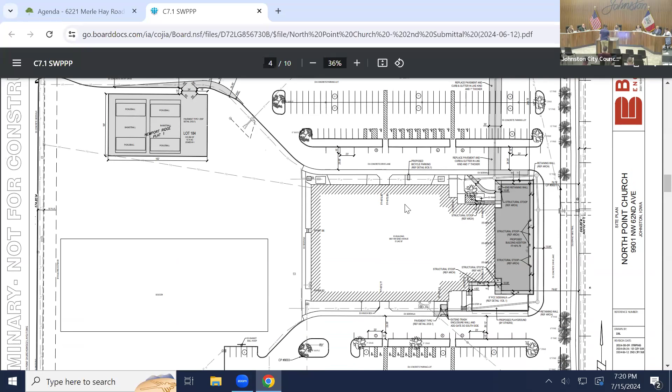This application was submitted by North Point Church as part of their childcare expansion. The site was rezoned this past April from R1 district to the C2 district, and as proposed meets all the required bulk regulations as well as open space and parking requirements. With the removal of the existing trees on the east side of the site due to the building expansion, the applicant is looking for council acceptance of an alternative landscape buffer consisting of 6 understory trees as well as 10 evergreens to be planted in line with the existing buffer that currently exists.

A new detention basin is to be constructed on the northwest side to pick up the new impervious surface that is to be built. The discussion last Monday at the Planning and Zoning Commission centered around the recreational facility next to that detention basin, the pickleball/basketball courts. That would be open to the public, and would be used for additional parking during big events such as Easter service or Christmas service.

A member of the North Point team is here. He can discuss in further detail their intended use for that and any additional questions you may have for them. The commission, the P&Z board, did recommend approval, and I can answer any additional questions you may have as well.

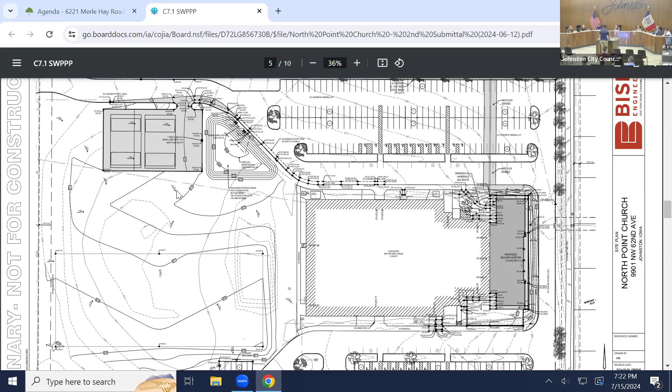Council, any questions for Jacob? I do, Mayor. Jacob, tell me again, how many trees are being removed? They're removing 12 trees on that east side, and they were going to replace it with 16 for that buffer, as well as 4 trees planted around those basketball courts in that detention basin. So we're removing 12, we're gaining 20. So they're planting 20, so we're gaining 8 trees in total.

But the trees that we're gaining, we're losing oak trees and gaining understory trees, which are typically not as long-lived as an oak tree, nor are they as supportive of native plant material.

Do you think the owner or developer would consider working some more oak trees back into the plan? I cannot answer that question for them, but I would give it a recommendation.

I won't make it a requirement, but we lose canopy all the time, and oak trees support a number of our native bird species more so, and they're longer living than the understory trees. So I would appreciate it if you could find some space for a few oak trees. Thank you.

Any other questions? Is there anyone in the audience that would like to address the council on this item?

Please state your name and address. Evan Riddell, 6708 Sheldon Court, here in Johnston, Green Meadows North. Greetings, Mayor, Council. Just to answer your question, I'm the Director of Operations at North Point Church.

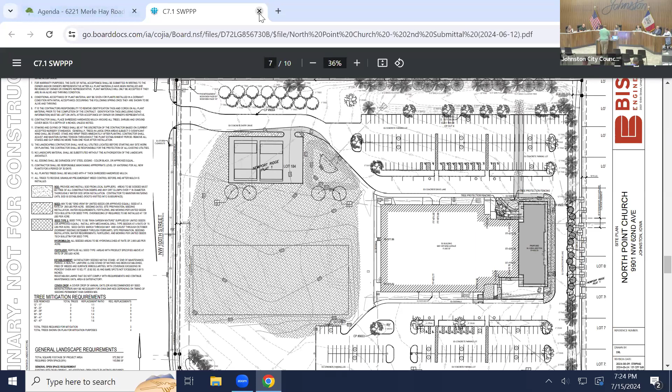Item 7C, consider approval of resolution number 24-189, a resolution approving the preliminary plat for Greenwood Haven Plat 1. The subject property is located at the eastern termini of Northwest Windsor Drive and Timberwood Drive, PZ case 24-16.

Good evening, Mayor and Council. Tonight you have in front of you a preliminary plat that subdivides 9.9 acres into 14 lots for single-family residences, 1 stormwater detention outlot, and 2 public street lots. Property is located at the eastern termini of Timberwood Drive and Northwest Windsor Drive, just west of the Greenwood Hills Park on Northwest 86th Street.

Start with a little background for you on this project. The parcel was platted as part of Greenwood Hills Plat 3 in 1996 as an outlot. It was intended for future development and extension of the roadways at that time. We just have not had the proposal come to fruition, and we have this in front of us now in 2024.

No other approvals have occurred to date. Property is shown on the Thrive 2040 comp plan as suburban mixed residential, and the proposed usage would be compliant with the comprehensive plan. Property is presently zoned R160 small lot residential zoning district, and lots would meet all bulk requirements.

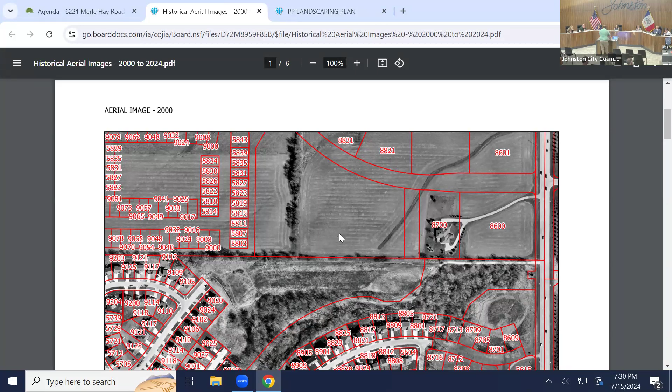The property is presently heavily treed. There's no debating that. Looking back at historical aerial images, a lot of these trees grew up since about 2000. I did provide you in your packet aerial images, which I also have up on the screen, that show the change of the area from more of a field into a tree-covered parcel by 2024.

The trees on the site - this applicant did do a survey pursuant to city code of 15% of the area. They did 2 samples, one on the north, one on the south, generally representative of the site, and then we can extrapolate out the total quantity of the site based on that data, as allowed by city code. They found a combination of ash, black cherry, boxelder, cedar, cottonwood, elm, hackberry, and mulberry within the site.

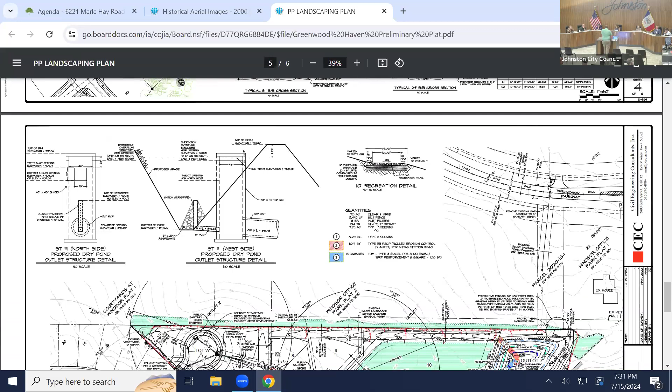The applicant is proposing to remove areas of the tree cover. They are looking to preserve approximately 3 acres of tree cover, with 2 areas of preservation of special note: a 25-foot tree conservation easement along the existing trail along the southeast, which would be a no-disturbance area. That is really intended for several purposes.

One, that is the area where we're likely to have the greatest benefit to the public, being that it's adjoining a public trail rather than internal to a private site. Our Parks Department also had concerns about constant flow from irrigation systems sheet flowing across the trail. In other areas of our community, we've had that issue where it causes a slimy surface. By having this 25-foot easement, irrigation systems couldn't be right up on the trail, so they'll have to sheet flow and infiltrate into the ground before they can get there.

So it should minimize that concern of getting a slimy surface on the trail, and that's what our Parks Department was primarily concerned about. Another area of preservation is within Lot 10. The applicant is looking to build their own personal residence there - they can certainly provide additional context of their plans on how they'll develop that lot. There is also a 15-foot trail buffer along the existing trail.

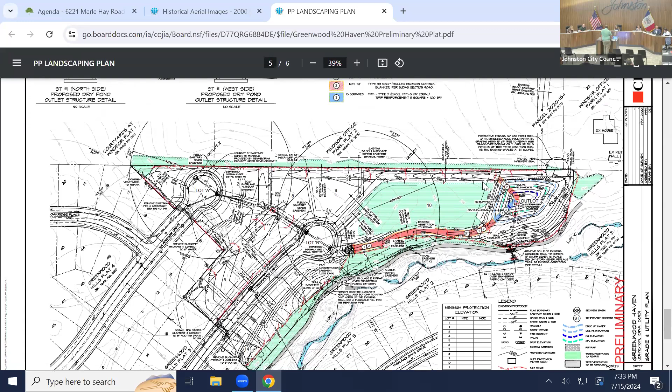The applicant is requesting council accept an alternative - acceptance of the mature trees along the trail in lieu of planting new trees. The exception would be if there is an area where they have to remove trees where that buffer is required, they would replace them in accordance with the standards. That would be in the lots 10 through 11 area. And then along the stormwater basin, those would be the areas where they'd have to come back and replant. Other than that, the existing mature canopy would be retained.

Parkland for the site was, yes. When you say along the stormwater basin, are you talking about the stormwater basin in Outlot Z? Yes. Okay, yeah - they are showing plantings there along the toe of the slope for the basin there on Outlot Z, on sheet 6 of 6.

Parkland for this site was dedicated with Greenwood Hills Plat 3 in 1996, so no additional parkland is required. The property is not located within any FEMA floodplain. All adjoining roads are presently constructed to urban standards, so there would be no improvements to adjacent roadways.

We did provide notice to immediate adjacent property owners as well as all property owners on Timberwood Drive down to the intersection. Those are really the property owners we anticipate to have the greatest potential for impact from this development, being immediately adjacent.

We did receive a number of public comments. I provided those in your staff report, and there was one additional that came in this afternoon. I provided that to you via email as well as added it to board docs. I also had a copy of the P and Z minutes on your board docs as well.

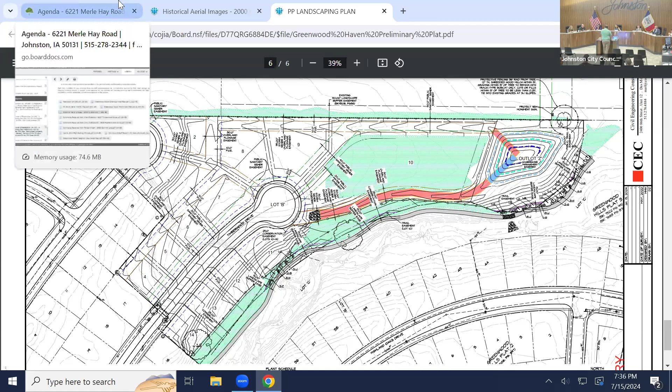Other questions for Clayton? I do have a couple of questions. The first has to do with, as you mentioned, the easements and private access across that north land. I know there were some comments and conversations in the P and Z meeting about the developer reaching out to see if they could secure, even beyond the sewer access, staging areas for equipment and things along those lines. Was there any further follow-up on that you're aware of?

I believe they've reached out, but I'll let the developer answer that since I wasn't involved in those conversations. I also want to make sure I'm reading this map right, since this isn't my forte. I'm looking at page 6 of 6 of the plat in front of you—the light green shaded area represents what? Trees to be preserved. Okay.

How many trees won't be preserved, as extrapolated from the survey? I don't have that number right in front of me, but I could certainly figure that out, maybe in between comments.

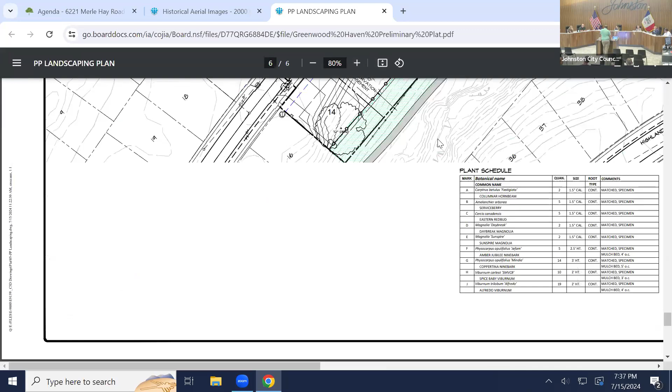The other thing I want to understand—the 25-foot conservation easement is measured from the back lot line forward. Is that correct, the rear lot line toward the front? Okay, so it's the rear 25 feet. It looks like, because the trail is currently encroaching, there won't be 25 feet of conservation easement away from even the center line of the trail in a couple of circumstances—is that correct? That is correct, and that would primarily apply on lot 11 here.

They are showing new plantings in accordance with our standard trail buffer easement requirements. What would be the distance from the edge of the trail to the conservation easement on lot 11—to the existing 25-foot easement? Yes, is there even a 25-foot conservation easement declared for lot 11? I believe it is shown, because there would be some preservation in the southwest area.

I don't know what that solid line is with those small circles—it looks like it cuts right to the trail. So they're showing some shrubs, some new trees here. They are showing the line that's in the trail—that's the center line. So I can get you a measurement. I don't have it off the cuff, but I can get one really quick.

While you have that zoomed in, do you see that lower left-hand corner of lot 11, nearest the trail? What does that solid line represent? This purple one? No, at least on mine it's black.

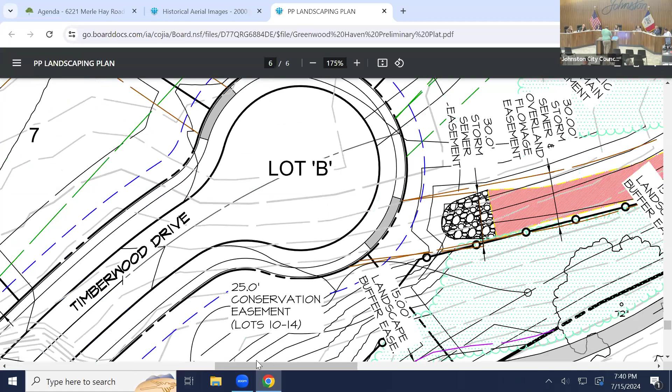And then lastly, let's talk a little bit about this overland flow. Will it cause trees to have to be removed to put in that overland flow? Yes. And what's an alternative to an overland flow? A pipe in the ground.

And the advantage of overland flow, as you shared with me last week, is it does allow for some evaporative means. It also allows for some kind of stilling of the water to some extent, right? So we get water quality improvements that we wouldn't necessarily have through a tube. That is absolutely correct. Okay, I just want to make sure I understood that correctly. Even if you did a pipe, standard would be you'd still remove the trees because you have to dig the hole to get it in, and we don't want trees over pipes generally, especially public utilities. So either scenario, I would anticipate tree removal. The swale at least gives us additional benefits for water quality improvement.

Is there any part of that swale that is within the 25-foot easement or the 25-foot conservation? Yes, this very southeastern portion. The version I have in front of me, which I updated earlier today, has trimmed that conservation easement back to the western line of the overland flowage easement. So that conservation easement would not run the full length of lot 10. It would stop kind of where I'm going over with my cursor there. Is that what's currently depicted right now? That's what's depicted on the most current version, which was updated a little earlier today, this afternoon.

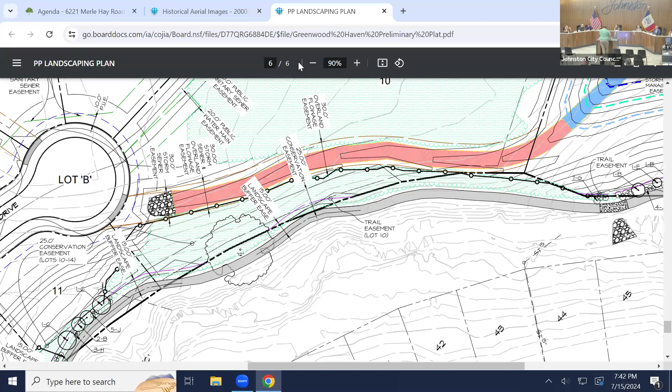We did a fairly extensive stormwater management project in this area between the two streets, between Highland Oaks Drive and Timberwood Drive. Was that the whole expansion all the way down to our park, or did it stop somewhere in there? Can you show on the map where that project stopped? It went all the way up to the public road. So it went from the park all the way to the public road?

Yeah, and the park was - so actually we've already constructed, gone through this whole ravine fixing the eroded slopes? Yes. For some reason I thought it didn't cover that area.

Okay, and through that whole area the pond was constructed to address some water quality and quantity requirements. We made it pretty much as big as we could with the footprint we had. It's not the size that would meet current standards, but considering the original developments didn't have any stormwater management, anything was an improvement, really. That was going to be one of my questions, because I watched the P&Z video, and someone had mentioned that it was undersized, but we pretty much got it as big as we could with the space we had. Yes. Thank you.

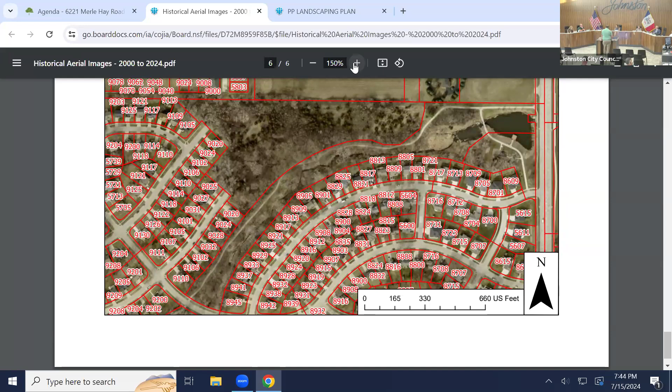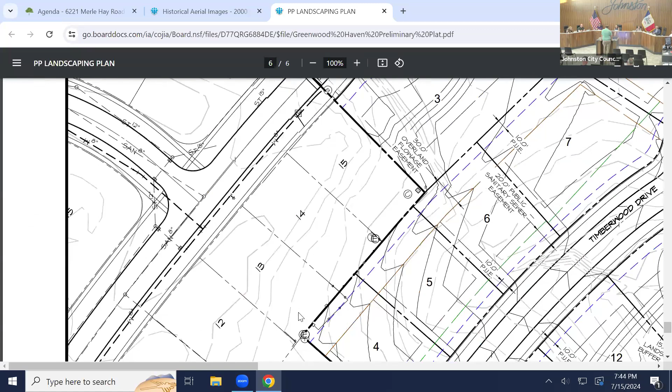Other questions for Clayton? Just as a little bit of follow-up, I also listened to the P&Z meeting, and one of the things I heard from some of the residents who talked at the meeting was concern they've expressed, or met with city staff about, erosion they've seen along - not along the trail, but stream bank erosion after that project was completed. I wasn't aware of that. I don't know if you or Dave, or maybe I just misheard, but what I was hearing was that there were some residents who felt that the erosion protection project maybe didn't come to fruition as desired. I don't know if you or Dave could add anything to that.

So that comment was specific to where this new outlet comes, where it intersects with lot 45 to the south here, right when we're starting to enter into the forebay. I think it's important to remember streams do meander and move over time, so some amount of movement and erosion is to be expected. This would not be anticipated to make it worse. They are showing erosion control stone that would come from the outlet, and with the construction plans we'd get a lot more precise detail to make sure it's coming up to the top of bank on the opposing side, so any outflow is not causing an erosive situation on the opposing bank. That would be intended to be more fully detailed in construction plans, but for preliminary plat purposes, they are showing erosion control protection at the site where the erosion concern is.

We are aware of that area as staff, and we are continuing to monitor it. But like I said, it is kind of entering the forebay. That slight movement one way or the other is to be expected, and it hasn't reached the level of concern to warrant city intervention yet. Okay.

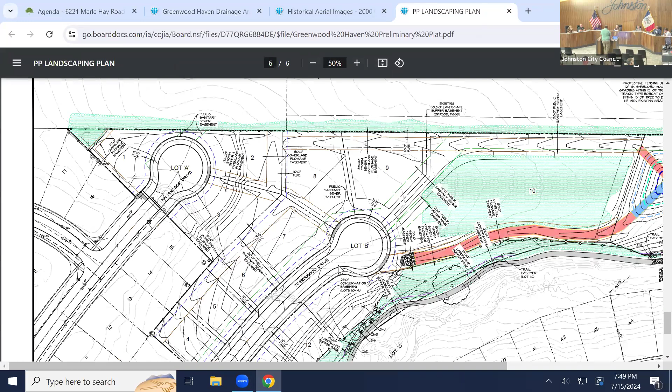There's been a question raised about the cul-de-sac on Windsor Drive — I think it's Windsor, whatever the northern street is there — that if cars are heading into that area, whether there's enough of a buffer for the people who live in the neighborhood to the north in that EPCON area to keep headlights and those types of things out.

As I understand, with a development like that, each developer is supposed to have a 30-foot buffer — could be 15 feet on one side, 15 feet on the other. But in this case, EPCON has all 30 of that on their property, right? That's correct.

And I drove up there today, just as a follow-up to prepare for today's meeting, and it looks to me that EPCON has built a small raised area — a berm, thank you — and there's even some plantings on top of that, and obviously a lot of existing vegetation there too.

Is that your understanding as well? I went out there today as well, and from my inspection, it does not appear any of the required landscape plantings have been installed to date. I did make the developer aware this afternoon that they are required to get those installed.

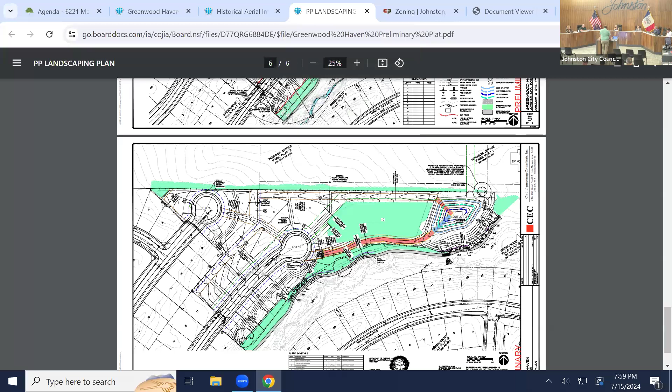Mayor, I have a follow-up since we're on the topic of protected trees. Does staff feel comfortable that we will not be losing any of those protected status trees based on an extrapolation of 15% of sample? Well, a protected status tree is anything 6-inch caliper diameter or larger. And I never saw anything in the site survey within that 15% that talked about a caliper size of 6 inches or larger. Is the sample quantity only those that are 6 inches and larger?

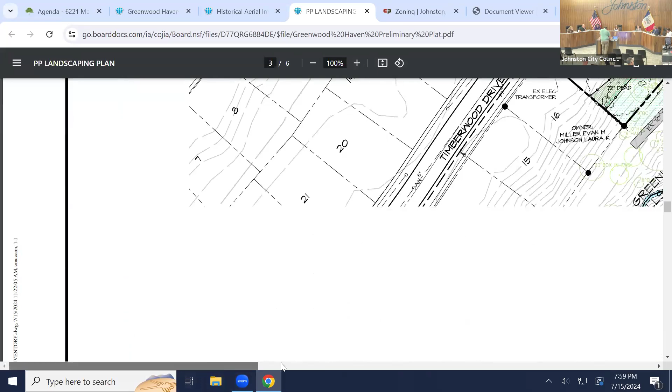I'm looking at the staff report where you listed the table. In the staff report I did not get the specifics on it, but on the plan itself, sheet 3 of 6, bottom right-hand corner, they do break it down by species and size. For the purpose of the staff report, I just consolidated it down to species to really try and reflect diversity of species, but that data is presently up on the screen.

Does our current resolution before us explicitly indicate our revocation of these protected trees that are listed on page 3 of 6? It does not explicitly state that. By approval of the plat showing the removal, you're approving the removal. It's not explicitly written as such.

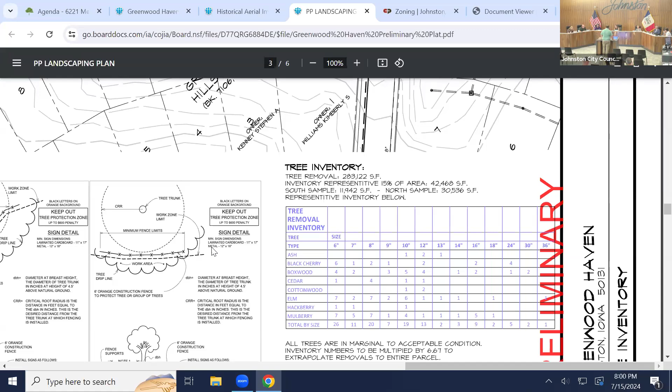And just for clarification from our legal counsel, based on the ordinance that Clayton pointed out, do we need to explicitly revoke? Can you go back to that ordinance, please, Clayton? The code specifically says that protected tree status may be revoked by the city council with the approval of a site plan or plat. So if you are approving a plat that shows tree removal, you are approving that tree removal. That is implied through that. And that is consistent with how we've done past approvals as well.

Any other questions for Clayton? I do have one last question for Clayton, I'm sorry.

So I'm looking now at sheet, I think it's sheet 1 of this site plan. Cover sheet? No, I'm sorry, sheet 2. This kind of goes to council member Burkhart's question about protecting trees that are on lot 10 as that overland flow easement gets close. So these are all the circles of trees that would be—if I see a circle and I see a tree numbered, is that vegetation that's going to remain, or what is the dividing line?

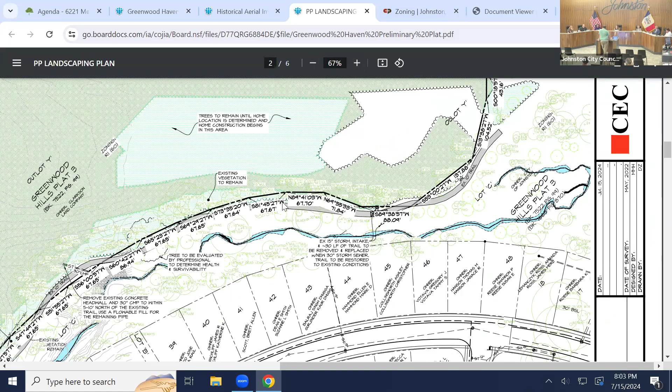Lot 10 still has trees in the buildable area. So the dark green that I'm looking at on page 2 of 6 has that massive span of hatched green. That's what you're calling the dark green. And if maybe I misunderstood, any tree within the hatched area, we're giving permission to be taken out.

Yes, that is what the applicant has requested. Clayton, how many trees is that? I'll get you that number when I sit down, I do not have that right on the top of my mind. The applicant can certainly provide additional commentary on their basis for the ask.

So if I- the light green hatch is not tree removal, those are protected trees. No, I'm looking at the dark green area all around the island of light green.

All where lots 1, 2, 3, 9, 8, 7, 6, 5 - all of the trees on any of those lots could be removed? As proposed, they are requesting approval to remove all those trees.

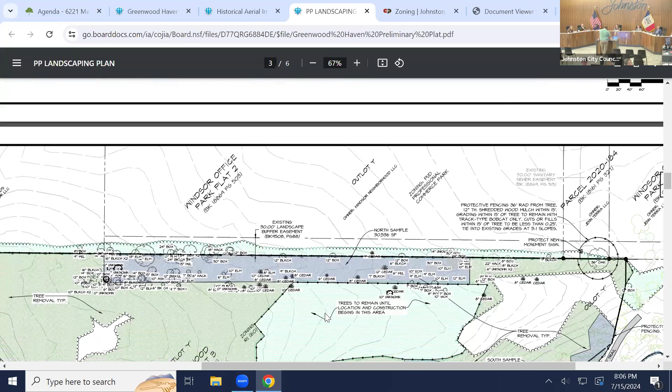But the condition that we are being asked to approve, number 5: city council acceptance of an alternative buffer for the required buffer along the side and rear lot lines adjacent to Greenwood Hills Greenway Trail. Said alternative buffer shall be composed of existing mature trees to be located within a tree conservation easement encumbering the southeastern 25 feet of each lot. When gaps in the existing vegetation are created due to removals, new plantings shall be installed in accordance with the standard buffer requirement.

I don't see any language in 5 that indicates that the buffer would be any less than 25 feet. I think the intent, and maybe it didn't come through well, is the fact that there's not technically a buffer that encumbers into this site at that location. If you measure 15 feet from the center line of the trail at that location, it stays on the city-owned parcel.

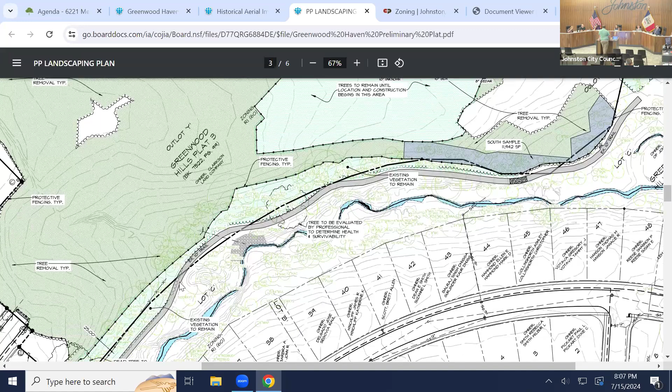As you move west, it does get onto their site. What gets onto their site? The 15-foot buffer - it's measured 15 feet from center line of the trail. Right, but we're waiving the 15 feet.

I just wrote it as a blanket statement with the intent being, and maybe it should have said it this way, where the buffer is required, we're accepting the 25-foot easement in lieu of planting new plants. But why isn't the buffer required all along Lot 10? Because even if you said it just like you just said it - and I think it could be interpreted that way, and I guess if that's the way the council feels, that you're granting the alternative with the construction plans, we just make sure that additional plantings are shown in that location where they'd be doing removal.

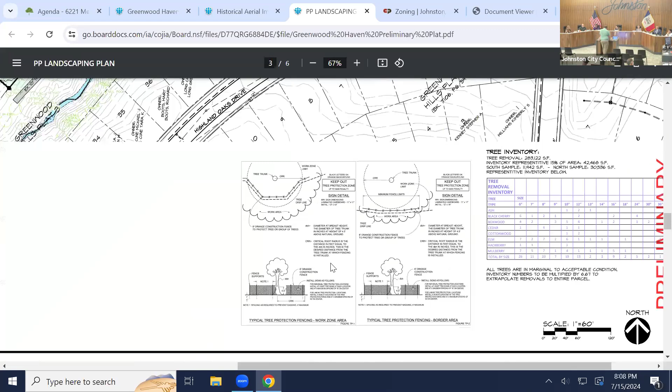I don't think the condition says that. The condition talks about a 25-foot easement shall be composed of existing and mature trees to be located within a tree conservation easement encumbering the southeastern 25 feet of each lot. So their tree conservation easement doesn't encumber the southeastern 25 feet of each lot in that spot, correct?

No, so just to make sure I'm understanding correctly, as they have it shown, you're thinking condition 5, if it was to match what they're showing, should be the southeastern 25 feet, except the eastern, I don't know how far that is, 120 feet or so. I'm not saying that's what it should say, but I just want to make sure I'm understanding what you're saying.

What I'm saying is that the language in condition 5, as I understand it, we're replacing what would otherwise be a 15-foot easement with a 25-foot easement, right? Yes. Okay, and it states that that 25-foot easement exists all along the property.

But I think we're acknowledging, or you're acknowledging, that that isn't the case in the final 120 feet of the area, and that's part of the area where the trees are planning to be removed per the green hatching, with all the trees being removed. So I think part of it is that the condition in number 5 isn't accurately stated, and I think is confusing.

And I think that leads to the additional trees, which gives the developer the authority to remove trees that some folks may have concerns about. I'm certainly willing to, I think part of this is because it's an overland flow easement, right? And I see value in the overland flow easement, so I'm certainly supportive of that. What I'm not supportive of is conditions that I don't think are accurate to what the plan really says, and I don't think condition 5 is accurately written.

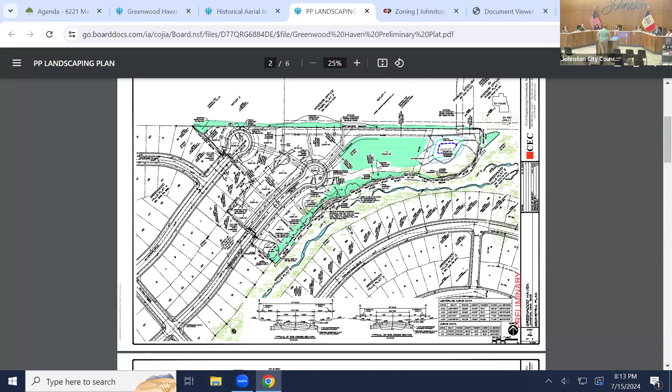Let's go back to that hatched map, page 3 of 6. I just want to make sure I understand. I presumed that the blue hatch was their sample areas. Is that correct? Correct. Is it safe to assume, which I know gets me in trouble, that the blue hatch, though for the purposes of tree removal, is the same as the dark green hatch? In other words, anything in the blue hatch could be removed?

Is there a disclaimer? Don't think that they are one and the same. For the removal purposes, I would direct you to page 2 of 6.

So anything in page 2 of 6, which appears, at least on the northern side, to be the same. Yeah, it's the southeastern one. I can't tell right from... without zooming way in probably.

Melissa, maybe you know, does the southeastern area encompass removal, or is there an area of preservation? That is an area of removal for the construction. So both areas of blue would be within the areas of removal.

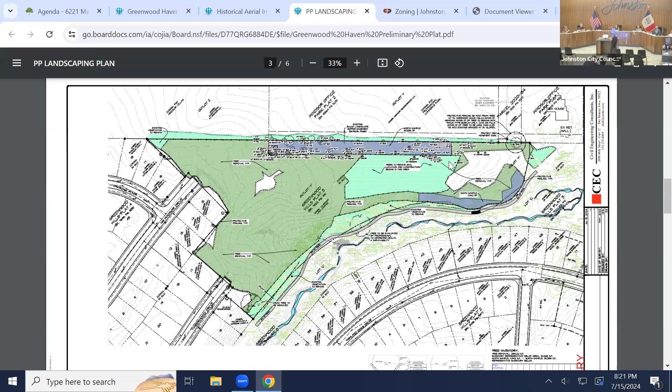I see why you like that property. That's why we bought it. But I also hope you see that's why we want every tree to stay wherever we can, at least along that property. Councilmember Cope pointed out that there is not, in your plans, a conservation easement along that last 120 feet or so of the property on the southeast side. Would you entertain putting in a conservation easement? And if that impacted the location of your overland flow, would you consider moving it so we could keep that conservation easement?

I was talking to Melissa. I think she said that's the only spot she could put the overland flow without disturbing things. You can come and speak. I'll defer to her. I do want to speak to something.

I do want to note how much we appreciate the changes and modifications you've made in the proposed development: fewer lots, a shorter cul-de-sac. I also really appreciate that you agreed to submit the plan under our existing stormwater regulations as they existed prior to July 1st. Thank you.

Those concessions and your willingness to do that is not lost on me. I think those are very substantial and are greatly appreciated by me and I think the residents of our city. I just wanted to take this opportunity to thank you. Thank you so much personally for saying that. We want to do the right thing.

Melissa Hills, Civil Engineering Consultants, 2400 86th Street. Regarding the trees along that 120 feet on lot 10, the swale has to go in that area in order to get the grades to work, to get things to flow to the pond. If I tried to move it north, I would be cutting a ridge through the hillside, which would create more tree removal. So this has the least impact where it's located. We are preserving trees both north and south of where the swale will be. There's still 18 to 20 feet of buffer between the trail and the swale grading.

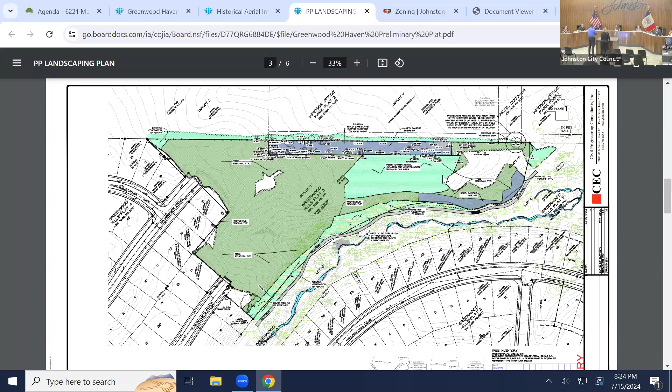Maybe you could clarify, does the diagram that shows the overland flow easement also indicate the trees that are impacted, or are those on two different slides? Because the blue hatch doesn't really show the overland flow easement, right? Let me see if I can get it to show that.

So there are some trees from the previous tree study that was done with the city project. They all appear to be smaller trees, 10 to 15-inch trees, cottonwood, elm, mulberry. So I don't think any of these are necessarily desirable trees that are in there.

I think the challenge, and I share Councilman Burkhart's interest in this, is that you're walking along that trail. From a trail perspective in Johnston, that's really one of two trails that are heavily wooded. So when you're walking by, the trees that exist there are providing you an ability to escape the urban environment. I don't care if it's a cottonwood tree or whatever tree it is. Obviously, if it's a tree that's dying and poses a safety hazard, that's a concern.

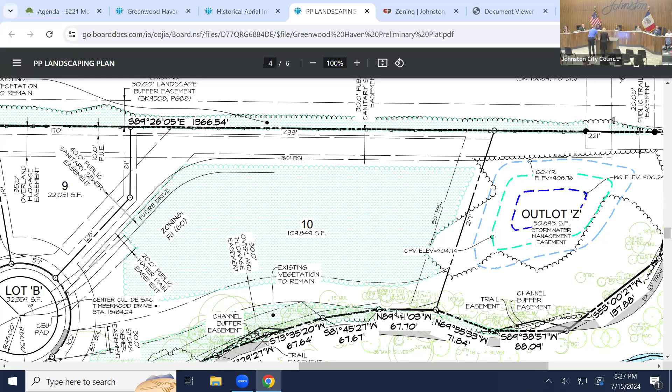So even at the closest point that it gets to the trail? Like, it looks to me as you go further east, right where it says S89, there's a dot that looks pretty close to the trail. And then further west, the grading line - where is your grading? Where do I see the edge of your grade? You'd have to go to the grading plan.

Basically, the grading goes up to the property line here, but there's still some space down in here that is not disturbed, where you see the red X line. The red X line is your grading limit? That's the silt fence that's shown there.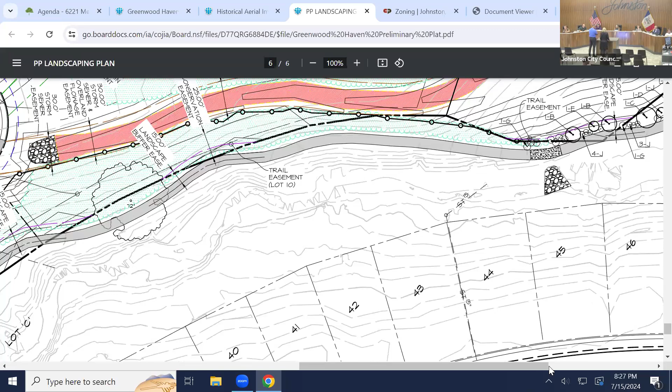Just, I guess, the thing is as you go further east, it gets closer and closer to the trail. Correct. And so where we are close to the trail, we've proposed the landscape buffer because that grading is necessary to get our pond volume and to get our pond constructed. So we are providing for new trees to be planted along that route adjacent to the outlot. But adjacent to lot 10, you've got this area inside city park ground that's not going to be disturbed, and we're in excess of 25 feet here.

But then on outlot Z is where you're proposing to plant a series of trees, kind of with the intent that those plantings don't get you back to a 25-foot easement though, right? Does your conservation easement extend to outlot Z? No, it does not. So it ends at lot 10?

Okay. Well, we trimmed it back because I guess we received comment that you didn't want it to overlap the overland flowage. So we trimmed it back to only include the areas that were not encumbered by that overland flowage.

Yeah, we'll definitely be open to planting trees around the pond. I mean, we like to bike and hike and run on the trails, so we don't want to lose that beauty of the nature. We'll definitely be open to planting trees around the detention pond to keep that as a park-like feel, and just definitely be open to suggestions there.

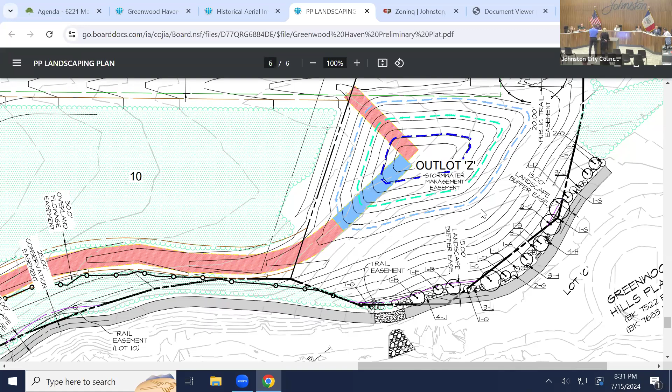Oak trees do a heck of a lot for our native birds, animals. Also, they are very long-lived. Pollinators use them.

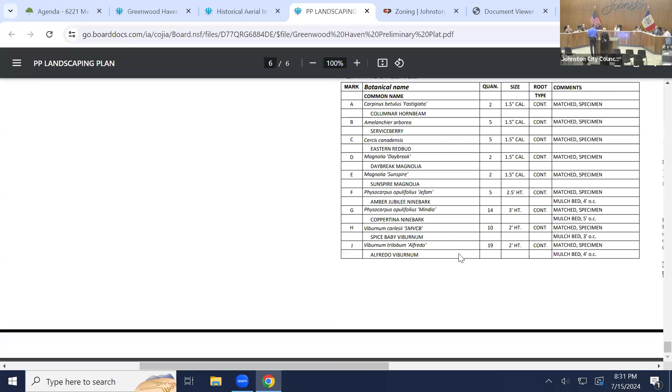I want to see this thing go back. I know it takes a long time, they take a long time to grow, but commit to us that there's going to be trees in there, oak trees that you're going to plant, so that in just a few years we're going to start seeing big, beautiful canopy. To Councilman Cope's point, we want privacy. I don't want all the trees cut down so people can look into my backyard. So I want privacy from the trail, and I want trees there for privacy and shade, because it cuts down heating and cooling bills. So definitely we want to do that. And I will commit, along with Luke and Melissa, to leave as much as we can and even plant trees where we have to remove them. Absolutely.

I have a question for the engineer. The tree protection fencing, or the limits of construction fencing, will that stay? I know that's part of platting and building, doing all the grading, putting in the cul-de-sacs. Would that fencing be able to stay all the way through the house building portion? Because my concern would be, as soon as that fencing comes down, there's this opportunity to start parking trucks and vehicles and tractors within the nice shady canopy that you've just protected.

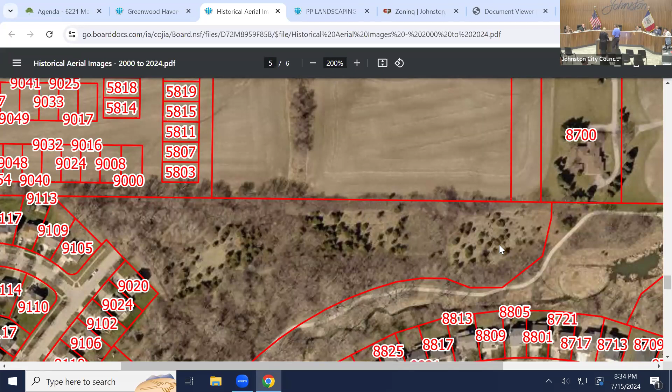I do want to mention that this area in the center, where you can see these volunteer trees that have popped up and there's some clear space, this is one of the historic aerials, these trees didn't exist, frankly, before Lou Clarkson passed. This was an open field with a few volunteer trees, but it was wide open when we topoed it in 2000. None of these trees existed here other than a few volunteer trees. And when Lou passed away, the kids quit maintaining the property, and that's when a lot of these volunteer trees were allowed to grow and create the tree mass that's there now.

You know, I understand that, and 20 years have now migrated since some of these pictures were taken. And you even commented that those volunteer trees were allowed to grow. To a great extent, any tree in existence in our incorporated areas was allowed to grow. In other words, 20 years is a pretty hefty investment of time for a tree, as evidenced by some of these trees that, if you had taken diameter or caliper measurements 20 years ago, wouldn't have measured even our 6-inch protected size, and now an ample amount are. So I don't necessarily think that just because this has changed in 20 years doesn't mean those trees are any less important, when in fact those 20-year trees are substantial and substantial to a community.

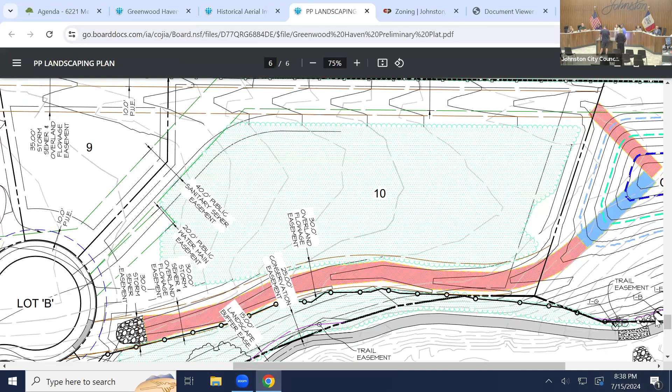Well, I'm just saying. Luke Waniger, 4159 Panorama Drive. I own JRL Builders with my wife. I think the biggest thing is you look at this tree removal grading limits plan and you're like, wow, this is a huge area, right? I mean, that's what you're looking at.

You're saying, okay, we want to save trees, and everybody does. Lots are more desirable when there's more trees on them. That's a fact, right? But you can't have your cake and eat it too. So in order to do grading, to put a street in here, to put 2 cul-de-sacs in here, to do all the stormwater detention, to meet all the requirements by the city, you have to remove trees. And yeah, if we could put cul-de-sacs in here, not do any grading, and meet all the city requirements for stormwater and paving without removing trees, we would absolutely do it, because those lots would sell for more and we'd build nicer houses on them. But you can't do that.

So what basically is happening is there's 3 things. One, there's tree removal. In order for this plat to be developed, there has to be tree removal. That's a fact.

By developing this land, it is benefiting the neighborhood for stormwater detention. It's exponentially better. Right now, all the stormwater detention drains into this dead-end street and just overland flows to where it wants to go. Well, we're channeling that and putting it where it's supposed to be. So all the erosion and concerns of the neighbors are basically alleviated at that point, because this is an engineered plat that is consistent with the remaining plat, and it's better.

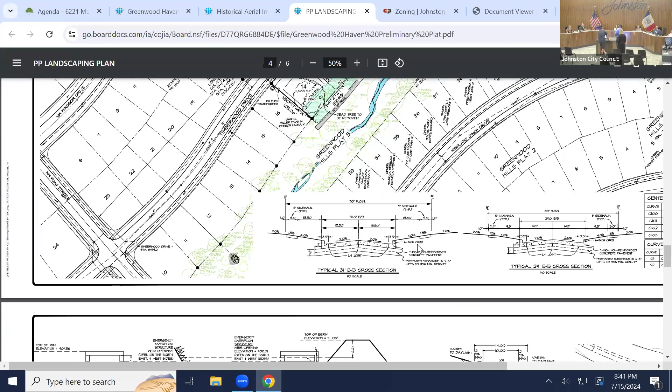The cul-de-sac on Timberwood, did the city require you to put in a cul-de-sac on Timberwood? We had to, working with Paul Jennings, he didn't want us to do anything with his property, so we had to come to this. The development, did the city require a cul-de-sac? Short answer, yes. You couldn't have done a hammerhead? A hammerhead's a temporary turnaround for future extension. There's no plans for future extension to Windsor Parkway.

And correct me if I'm wrong, Clayton, but that is the case.

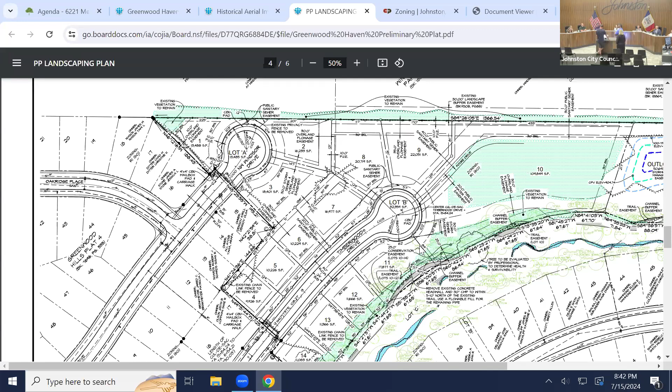It's been very evident that neighbors don't want an extension, and if I lived on the street, I'd be all in on that too. So that's why we came up with these 2 cul-de-sacs. Honestly, this doesn't do us any good for the cul-de-sac. It would be better to put a street through here.

But I want to get to the nuts and bolts so that everyone understands the decisions that were made when you decided to bring this plat forward. Neither cul-de-sac was required by the city. A termination of both Wynwood Drive and Timberwood were required by the city, but a cul-de-sac was not required.

Versus a through street, or? Versus a hammerhead, versus connecting the two, versus something else. Connecting the two is economically infeasible. There's too much land area that gets eaten up, and the dimensions of it don't allow for lots on it.

So these 2 termini of a cul-de-sac were both, one, based on what we had feedback in the past on not having a through street here, and two, Paul Jennings' inability to work with us on an extension.

Was there a reapproach, while you're on that subject, was there an approach to Paul Jennings while you're getting your sewer across that property, to be able to discuss some sort of temporary road access for staging of construction or even subcontractor vehicles as construction would take place?

The last discussion we had, he didn't want anything to be done through his property. He didn't want us to bring vehicles, he didn't want any construction traffic. We worked with him for 4 to 5 months, it was a dead end. So we had to go with this cul-de-sac concept, and we lost almost 8 lots doing that.

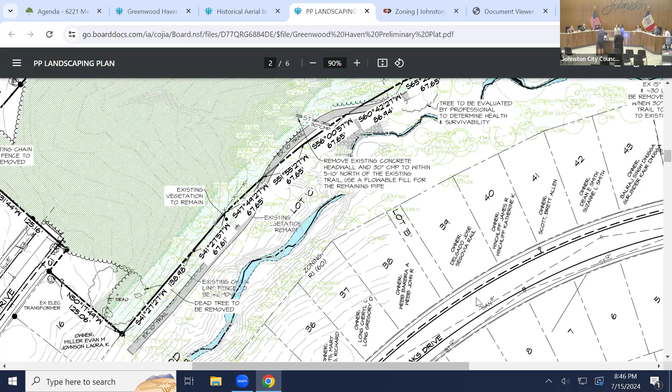Other questions? I just have a question about this condition 5 and the 25-foot tree conservation easement. So it says, talks about the 25 feet along each lot. And so do you consider Outlot Z not a lot? How does the 25-foot requirement not apply to Outlot Z?

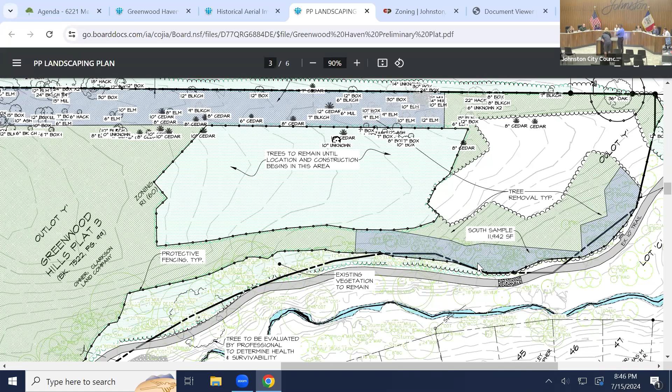I would just say that we didn't write the wording of that condition, but that 25-foot conservation easement has always been just along those specific lots. So if you wanted to clarify the condition to just refer to the lots that we're talking about, that might be appropriate.

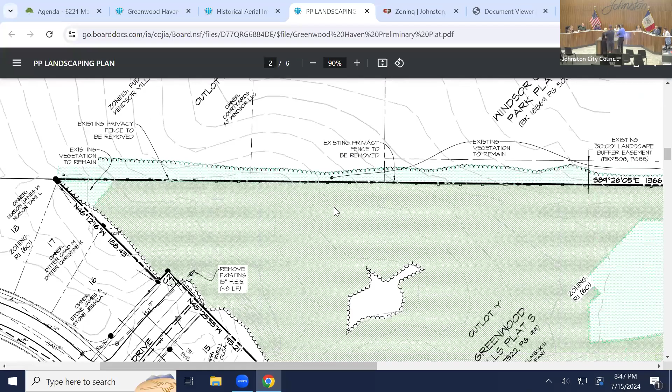So would that, Melissa, would that be lots 10 to 14? Or is it longer than that? Here, I get my... so lots 11 through 14? 10, oh sorry, 10 through 14, or a portion of lot 10. Yeah, 11 through 14 and a sizable portion of lot 10, okay. And we also have a portion in lot 1 as well, although I don't see a call out for that conservation there, but...

Any other questions?

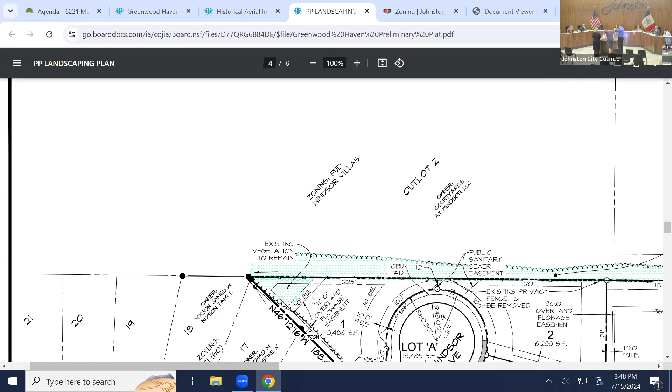I think tree removal is obviously a concern. It's a concern of the neighbors, it's a concern of the council, it's a concern of the developers. Maybe a happy medium would be, instead of 2 trees per single family house that needs to be planted, we double that requirement and say 4 trees.

Maybe it's a more specific species, like 2 oaks, and you pick the other 2. Because honestly, in 10 years, if you require 14 lots to plant 4 trees, you get the ambiance of a treed neighborhood. The street is called Timberwood Drive, right? We want trees on these lots, but we have to grade to allow for development of the property.

And in order to grade, we have to take trees down. So maybe it's a happy medium that we say, okay, instead of 2, we do 4. I would be all for that. And Councilwoman Martin, we'd probably want more diversity than that though, right? There could be more diversity than that.

I appreciate that offer or suggestion. I think it's unfortunate - Johnston, everybody wants to live in Johnston. I have a newly married daughter, she wants to live in Johnston, she can't afford to live in Johnston. There's not housing available that she can afford. And we're putting housing in places where there's a reason this hasn't been developed 20 years ago, because it's difficult, because it's got slopes, because it's treed.

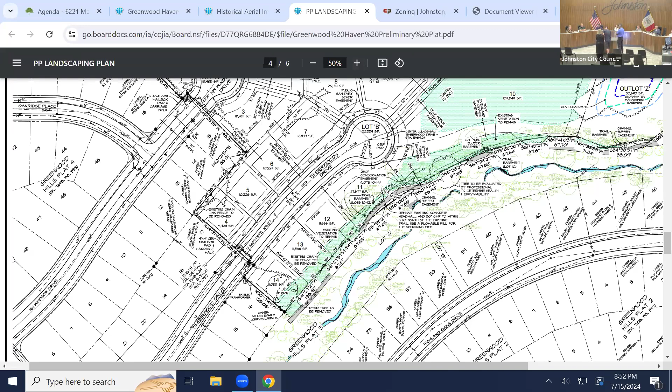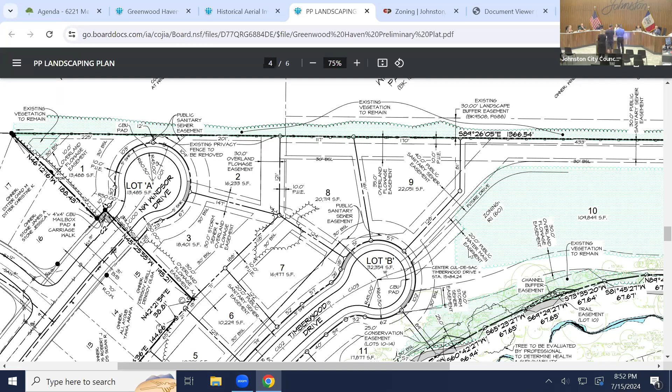Well, and if you look at - I hate the lots that are on the south side or the creek side of Timberwood. I think that those are very steeply sloped, but you know what? They're a lot wider than the ones on the other side of the slope, which means perhaps we'll be able to get some more landscape in between the buildings.

It'd be great if we can convince the people that are going to build on their lots that they don't have to have mowed lawn up to the edge of their property. And I will note that the 25-foot conservation easement doesn't allow for irrigation over that, so as far as mowing and sod, that won't be a case.

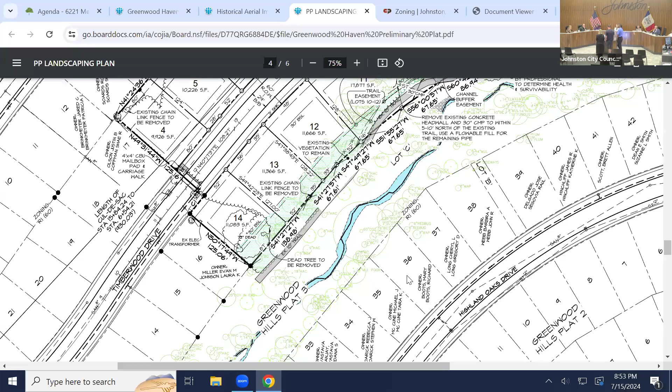I appreciate everything you guys did here. I listened to the video. I heard about you and your family and how this is your forever place.

I kind of wish we had standards, like you said, that we require more trees. We don't have ordinances written like that, but I am hearing you guys saying that you are going to do all the right things, and we don't have ordinances, so we have to rely on a partnership that everybody wants to do the right thing.

Any other questions for the developers?

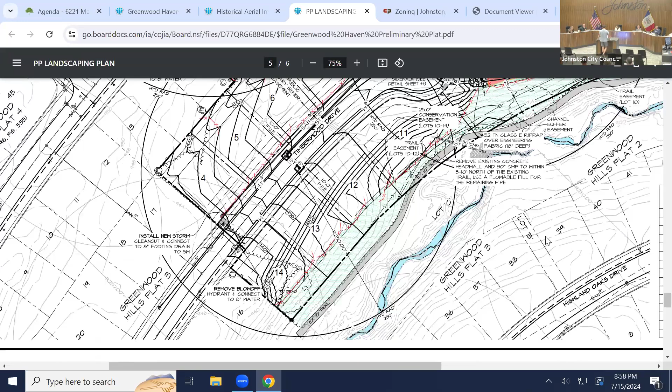Evening, my name is Chris Collinsworth. I'm the property owner at 8809 Highland Oaks Drive. My property is in your drawings labeled as lot number 45. So I'm on the other side of the creek from the plans that are proposed to you here.

Before I go into my comments, I do want to just thank the council for the discussion that's been taking place tonight. I appreciate the concerns that you have around stormwater and tree removal because I share those concerns.

In the drawings that are depicted here, Outlot Z, the stormwater management retention pond, is proposed to drain out into the creek and is pointed directly at the bank that butts up against my backyard. I have talked to the city in the past about my concerns with erosion in that area.

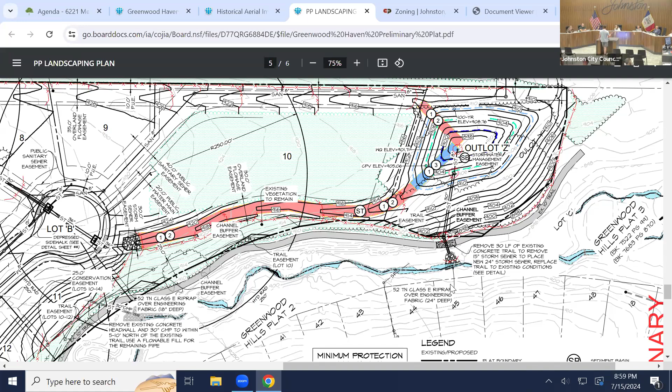10 years ago, when the city did the stormwater erosion project in that area, there was a lot of erosion control that was installed along the bank of the creek up until lot number 44, which is directly to the west of me. The lots, my lot included, to the east of me did not have very much erosion control, if any at all, put in.

My concern is that the erosion we've experienced over the last 10 years will be exacerbated by installing roadways and rooftops that will speed up the velocity of rainwater flowing through there. I know the engineer and developer have talked to you about how that stormwater is unabated currently. I strongly disagree with that characterization. I believe the topsoil and trees present on that parcel of land right now do a great deal to slow the water down. So my main concern tonight is with regard to stormwater.

If we could find a way to outlet that water, point it to the east coming out of Outlot Z, I would greatly appreciate that. There's a pond in that direction. You don't have to worry about erosion encroaching on property owners' backyards by adding stormwater that way.

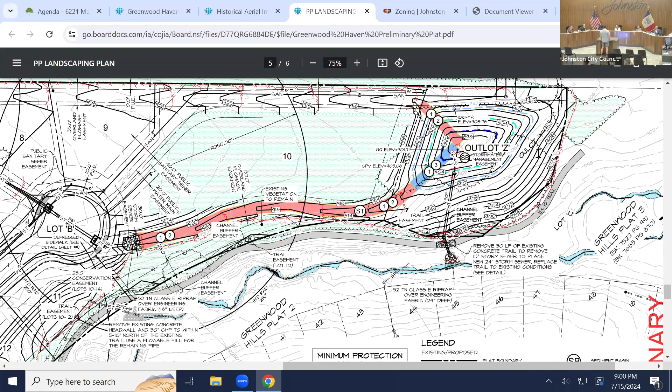I submitted a lengthy set of comments for the Planning and Zoning Commission to review. Within that, I offered a counter proposal suggesting that the city should purchase this property instead of developing it. I don't have the legal background to figure out how that should happen. I strongly oppose development of this property.

The reason being, as a resident, a longtime resident of this neighborhood, I have other longtime residents of this neighborhood—our homes have been here for 20 to 30 years. It's a mature neighborhood that surrounds this plat of land. A significant portion of the perimeter of this plat borders parkland. For those of us that live in that neighborhood, we've enjoyed and appreciated the magnificence of this property in its untouched state for years now. Most of us assumed this is already parkland. We've enjoyed this as a public good already.

So to see the proposal—I understand and I hear the property owners saying that they are working on preserving trees. But the proposal to remove over two-thirds of the trees in this area would be a great loss to the neighborhood and to the characteristics that make this neighborhood such an attractive place to live. If you have not already read my comments and proposal to the Planning and Zoning Commission, I'd ask that you give those consideration. Thank you for your time.

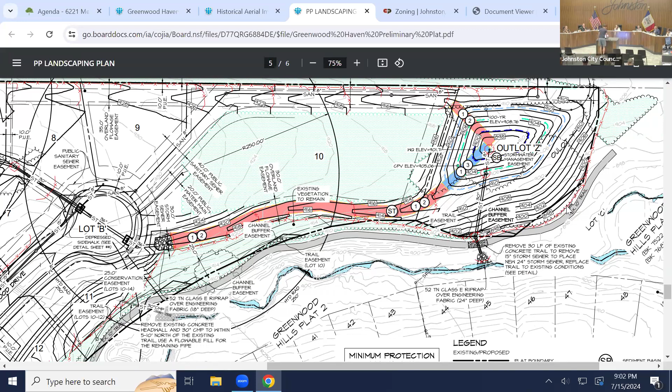Well, my name is Greg Votava. I'm the property owner to kind of dovetail off of Chris's comments, on lot 46—the property directly to the east of his lot. I share a lot of the same concerns as Chris. I've lived in this house for 12 years, so I lived through the stormwater management project earlier.

I know that Clayton mentioned that the creek is intended to naturally change its course over time, and I think the creek has done that. My property is unique—it's the only property here where the creek actually flows into my property along this whole lot. We did have some protection during that previous project, but it was only on the northwest portion of my lot. Initially, after that project was completed, I was able to hop across that creek without a lot of effort. Today, the creek itself, while it's also changed direction a little bit, is probably at least 15 feet wide behind my house.

Could you give me your address real quick? Yeah, it's 8805 Highland Oaks Drive.

So I get that the creek's going to change over time. When they initially finished that project, it was nicely sloped and graded down to the creek to hopefully prevent erosion. Today, if you were to go back there, it's basically a cliff off the side. So I have concerns about all that water flowing directly in there, especially into that outlot right behind Chris's house, his property. Ideally, like he said, if you could aim all that water further upstream or further downstream from us, into that whole floodplain created for the creek to split and go into the two ponds over there, I would love that—it would mean less concern about that water flowing directly behind our house, into my property as well.

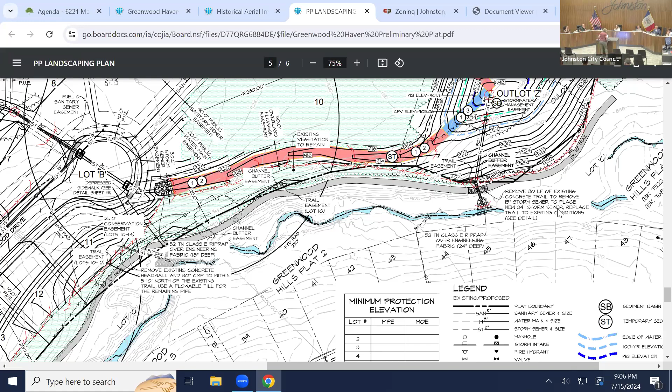Claire Matten, I live at 9118 Northwest Windsor Drive. I also had a concern, in addition to what you were saying about Lot 10 and Lot 11, about how many trees are actually going to be between the trail and the conservation easement, because there's definitely not 25 feet of trees. I'm wondering if there's even going to be 5 or 10 feet of trees because of how far into that property the trail goes.

Again, I have a concern that we're going to end up with townhomes or something else at the end of Windsor Drive. That's a concern. I don't think there's anything that can be put in writing to require the builder to only have single family homes there.

And then again, just the loss of all the trees and all of the grading that's going to be required, and whether or not the city can do anything to save this area. I would request that you seriously consider that. Thank you.

Any other comments? Okay.

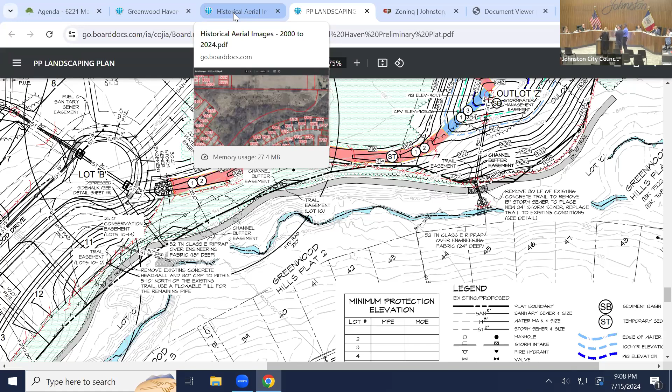Alyssa Hills again. Regarding the storm sewer outlet, there was some discussion about the location of where we're outletting and changing the direction of that flow at the P&Z meeting. We are willing to orient that pipe so it's pointed more with the direction of the flow. One of the comments from the city engineer was that they didn't want us to outlet down here in the area where they have the forebay for the pond. But I think we could orient the pipe pointed more downstream, if that would help.

Could you expand a little bit on, did they give a reason why they didn't want to go into that forebay? I know a neighbor had suggested that that area already is clearly wet-bottomed. It had something to do with the design of this forebay and the way the water flows around it. They did not want us to disrupt that.

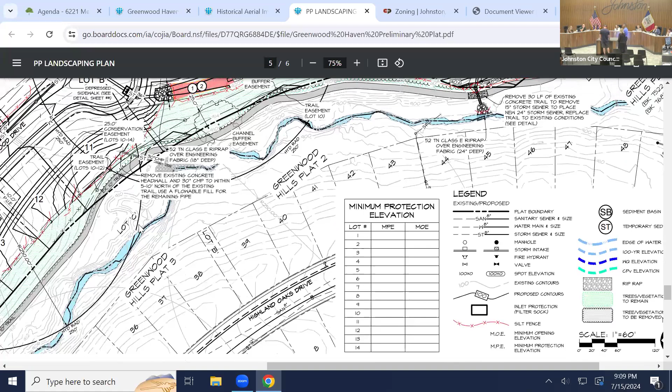I also think it should be noted that the intention of stormwater management is that any rainfall on this site isn't outletted at a faster pace or higher velocity than it was before. That's the intent of it. So the outlet of this pipe won't be any faster than what it currently is, and that's why it's engineered that way. So yes, putting the pipe parallel to the stream would help, but it's not going to be like a raging river after the development. That's why there is stormwater detention. That's how it's engineered.

I took a minute and wrote something up. So when we discussed earlier about sort of a guarantee there would be trees along the trail, would you object to having something similar to this statement put into the requirements of the platting? Additionally, the developer will commit to plant additional oak trees or other recommended species, spaced 30 feet apart, in any areas along the trail where, after grading, there are no viable trees over 6 inches in caliper within 20 feet from the edge of the trail.

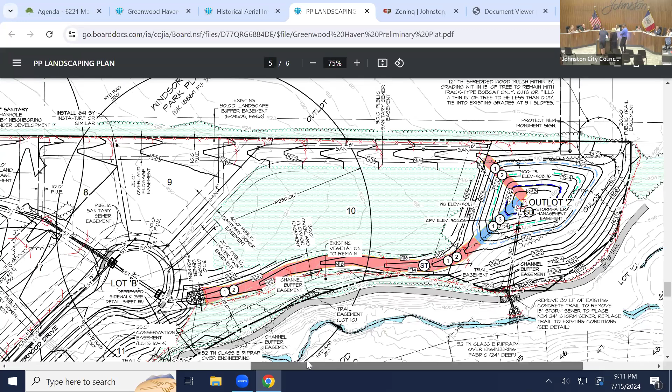And then there was also the request by the neighboring developer where the cul-de-sac bulb for Windsor Park Place comes right up to the northern property line. That would be a very easy place to commit to for the north edge of that cul-de-sac. Again, maybe a suitable shade tree every 30 feet. I mean, it can't be that many around there. And perhaps some shrubs for the headlights. I know he's asking that we not grade, and if you cannot grade and leave a substantial tree, I'm sure that would be great, but I'm not sure that's viable for that small a site. So you have this little sliver where the bulb comes right up to the northern property line.

You're not going to want people walking through those two property connections. You might consider a hedge of some native shrub like a viburnum, along with some shade trees. Maybe both of you then become a little happier. One thing I would like to point out is that because we're tied to the existing grades at the end of this stub, and what we can do grade-wise with the cul-de-sac, we will be sitting higher than the neighboring property by a foot or two. So I think the best way to screen headlights would be to do a hedge or shrubs on our side around the sidewalk.

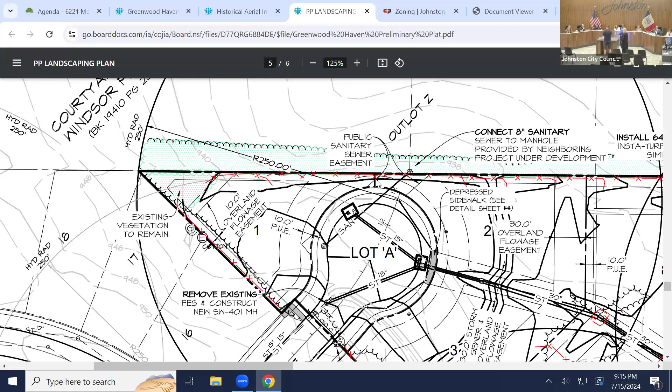Well, you're required to do 2. So in addition to your trees along the trail that you liked, we would do the shrubs and then we could double the trees. Landscape is always the last thing, but it's actually not that expensive an add and it does a lot. It definitely adds to the appeal. I mean, it's called Timberwood Drive, like I pointed out.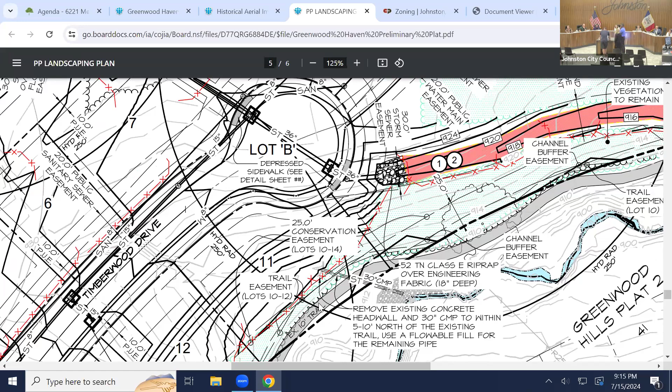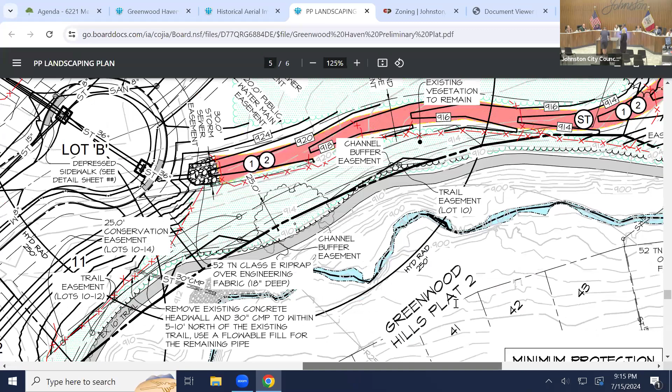We want trees. And I think it's important that when you're talking about the areas where the trees need to be planted, it's really along Outlot Z and Lot 11. Isn't it 11 where they have the trees that are already planned in there? That's what I'm talking about, but making sure that those trees are of the right species. I would recommend that some of the understory trees get changed to a recommended overstory tree for woodland areas. We have lists of recommended overstory trees.

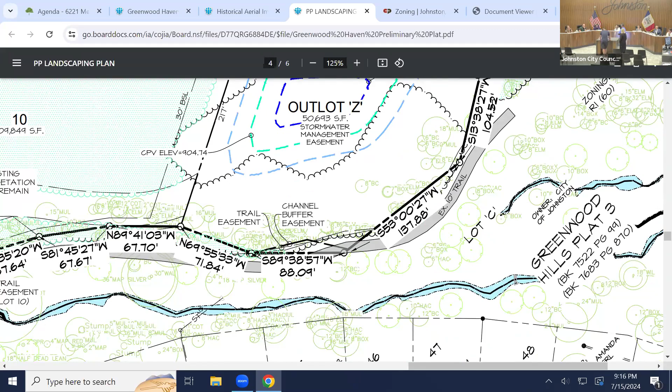One of the reasons why this is difficult is because the trail does get onto this particular property. Yeah, Nick, if we were going to list all the reasons why this project was difficult, we'd be here a long time. We've only hit on a few of them. But that is certainly a complication.

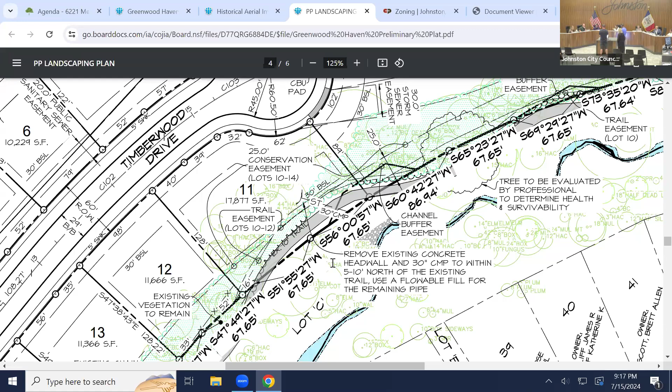Council, is there anything else that was raised in the comments from the residents that you think we need to have addressed? I was kind of working, well, Rhonda was working on something, I was kind of working on something too, but I think she covered most of it. Well, then maybe I would ask Clayton to come back up.

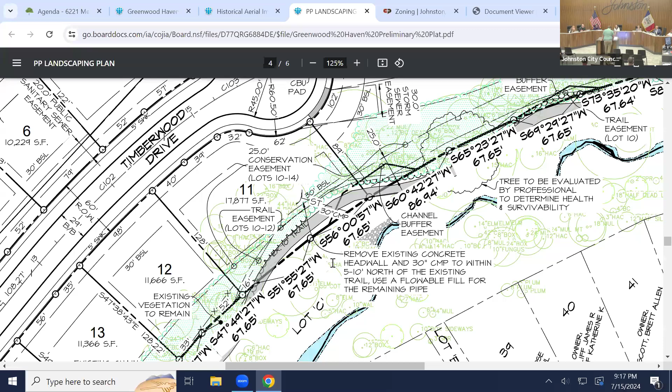So based on the conversation that was just had, what changes need to be made to the resolution? We need to do some clarification in 5. Let me pull that up, just a moment.

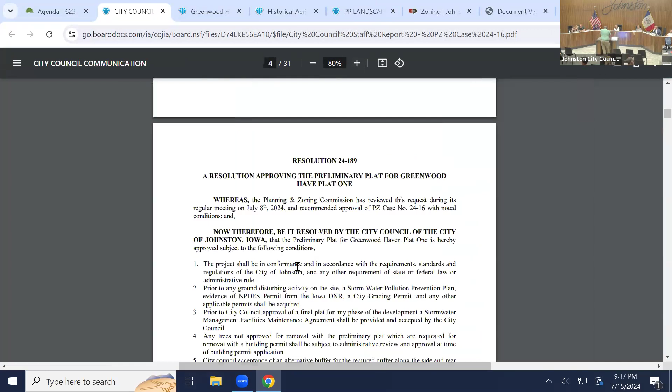If I was hearing that there was a desire to clarify comment number 5, the alternative buffer applies to lots 10, 11, 12, and 14, that we would accept the 25-foot existing trees in that area, except the southeast 135 feet of lot 10. That'd be where that overland flowage easement exists. Any area where there is a gap or not within a tree buffer easement, the standard tree or trail easement would still apply. I believe that was what I heard.

I heard agreement for installation of a hedge of shrubs along the north side of the cul-de-sac for Northwest Windsor Drive.

I'm gonna look to Rhonda here to maybe help me. What was the trees along lots 1 and 2? Along the trail or along the cul-de-sac? The cul-de-sac for lot 1 and 2. I think we said along the northern arc of the cul-de-sac that the developer agrees to plant a shade tree.

Based on the recommended list that we have, every 30 feet, and that they will plant a shrub hedge using a native shrub like viburnum in the public utility easement, right along that north arc.

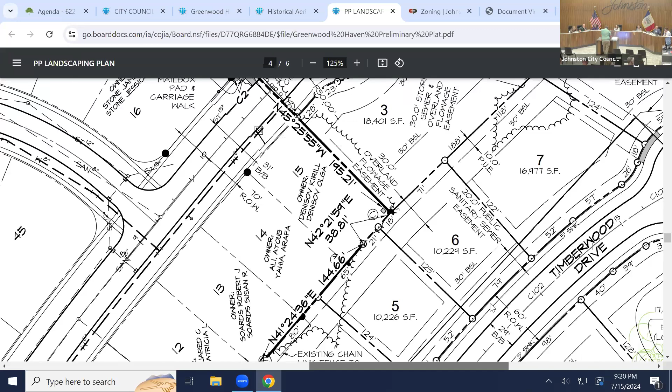Did I miss anything? Can you read the first part that you said, that there was 135 feet by the outlot that we were not covering, because it would interfere with the overland drainage? Is that what you're saying? 67 plus 67 is 135 feet.

And there's not room between that and the trail? I think there is, plenty from the trail, that's kind of what we're saying. So was it 18 feet from the edge of the trail to where the overland easement... if there's no trees in there, they're committing to plant trees every 25 feet. Yeah, that was the oak, and then I did miss something.

1 tree every 30 if 25... can't remember now. We had originally written 25. Oh okay, I said 30 when I spoke earlier, it was 30. So basically it starts at the point, the last 135 feet of lot 10, and then all through outlot Z.

And if there's already a tree in that area, they don't have to add another one. But if there's a gap bigger than 30 feet, then they put a tree in, a gap of no tree of 6 caliper inches. It has to be over 6 inches in caliper. And that's not the new tree, right? The old existing trees have to be 6 inches in caliper or more.

We're getting so specific here. I was panicking that you wanted them to plant 6-inch trees. We haven't told them what size trees to plant. I was gonna say 2-inch caliper. Our standard for open space plantings is 1.5 inch. Sounds great.

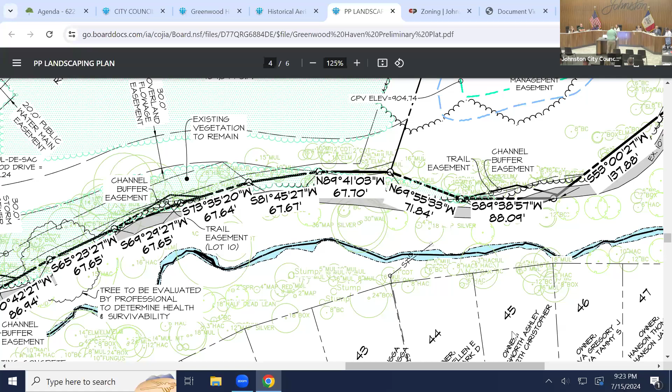All right, I added that one in as well. Anything else? Council, anything else?

What I would maybe end with is just ask Christine that she's comfortable with all these amendments. Whoever makes the motion to approve the resolution should say with the stated changes as discussed, and then Clayton can make those changes for the mayor's signature.

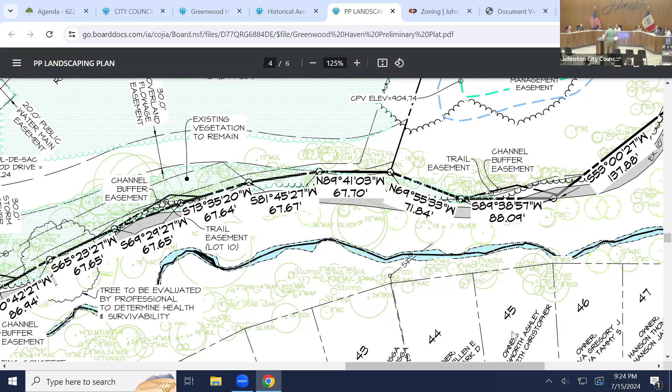I mean, it is my entire side of my... I guess I don't, but, perhaps yeah. Address that into the mic so it can be on the recording. Mary Beth Hagan, 5803 Northwest 90th.

So when you say your house faces, can you go to the screen and tell? Yeah, if you can do it with the one with the pictures of the lots where the trees are growing, with the photographs, yeah. This is our lot right here. Okay, and then Teresa's is 9,000 right here.

My entire, every window in my house and my patio area all faces this way. There's a very large wooded lot line right here on this lot line. And if this is clear cut and razed all the way down and graded to just flat with no trees, it will pretty much eliminate the reason that I moved to Johnston as the place that I wanted to be and was so excited to spend my retirement years here.

So, obviously they can't touch any of the trees or any of the buffer that is on your property. There's a 30-foot buffer, right. So they aren't gonna touch that.

Well, and that's, I guess, my question is, Clayton talked today about taking down the privacy fence, which is simply a lot line divider fence. So I just want to make sure that everybody has an idea that we will try as hard as possible to leave any of those larger trees that are right there on that lot line, rather than razing trees all the way down if possible.

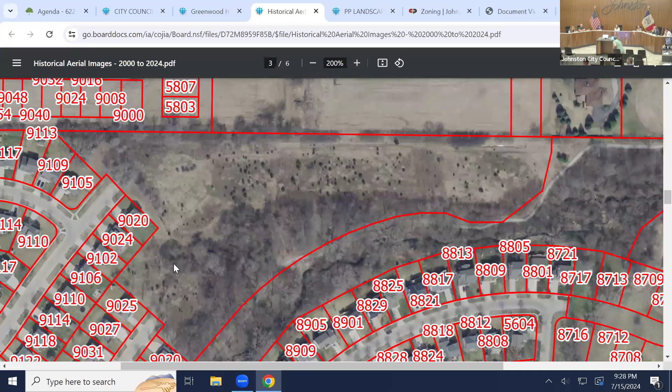That'd probably be, I don't know what that distance is, but it's probably about 200 feet, 7 or 8 trees. Lot 2 is 201 feet. Lot 1 is 225 feet. I mean, yeah, I can find room with 4 trees.

2 on mine and 2 on hers. Well, I thought that's kind of, we're gonna have stuff in our buffer, something in addition. Honestly, your buffer is what's required by city code in addition to the existing trees that are there. I don't know if a few additional trees 30 feet apart will even matter because of the existing trees.

And I guess that's my concern is, why do they have to leave the buffer with existing trees that are there? If you guys have a completely beautiful, 100% wooded lot that you're loving because that's where you want to put your home, I don't blame you, it's gorgeous back there. I guess I just don't understand.

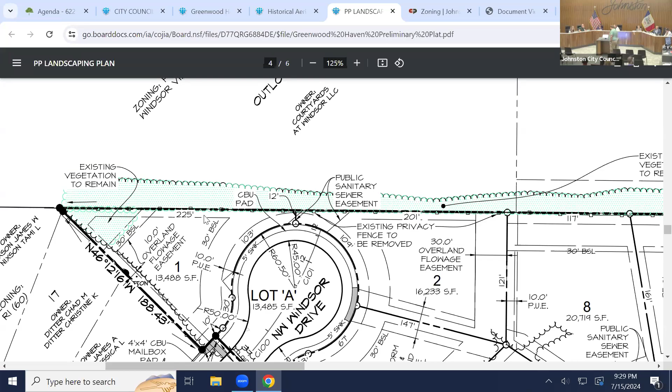The higher intensity use is required to provide the buffer. So this is single family, you're saying the lots aren't really big enough to build houses on without taking every single tree down to put the house? No, I'm not saying that at all. I'm saying in order to get the grading and pavement in and have it engineered stormwater-wise, the trees have to be removed.

So I'm hearing, because of the infrastructure that has to go in, the trees have to be removed. Because of the number of lots, right? Well, in addition, we have to tie sewer in right there as well. So there's this public sanitary sewer easement to the north that Justin brought to the south, and that's also required, and you have to dig a hole. So that's why trees get removed there.

But I really do think it's a non-issue, and I'm not trying to downplay your concern, but the existing trees that are there, plus the trees Justin will plant, I don't think the additional trees on lot 1 and 2 will do any good. I think what's already there, in addition to what's going to be planted, is sufficient.

If council's comfortable with Councilmember Martin's recommendation to have a few trees along the north arc of Lot A, we can work with the developer to make sure they're properly placed to provide the most benefit to the area, if that sounds agreeable. So there'll be a hedge there and also 4 or 5 trees.

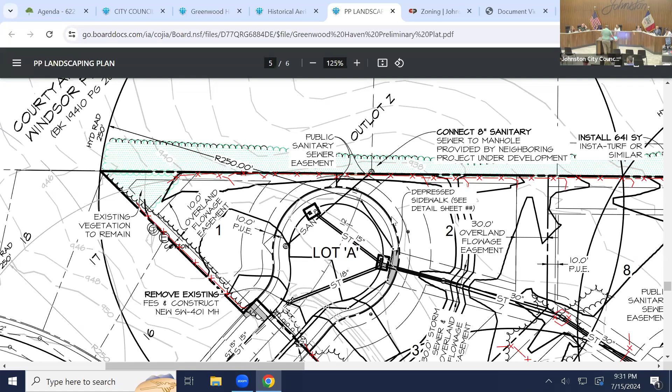Right, what is the plan for that? The tree planting within that 30 foot, is it specific as far as how many trees and the spacing of the trees? Yeah, there's a site plan drawn up, but we may try to change it up, like I said, to make sure certain sight lines are dealt with.

I did overlay your plan set with theirs, so that's what's up on the screen, showing what the landscape plantings from your site would be once installed as they relate to this site. So you are seeing new tree plantings and shrubs along the north edge of your property. Yeah, they just have yet to be installed. So all of those trees and shrubs you just highlighted, where is that in relationship to the 30-foot buffer - is that all within the 30-foot buffer?

Yes. And none of that's in place currently? Correct, to my knowledge. Correct, so that is still to be installed. The intent is with home construction completion - with completion of all the homes in the site plan? Sometimes we do them in groupings, so like we have 3 that we're building within 6 months, we'll do that stretch.

What we did in West Des Moines was, they came out and inspected - they didn't give us our last 3 permits until the city came out and made sure everything's good, so that's our standard. And those two, obviously you live in those homes today, they're existing. I closed September 4th. Okay, that one's finishing construction, that one is finished.

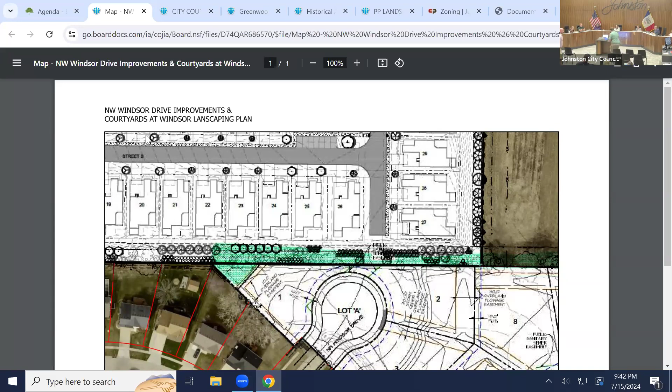We have one additional item under the non-consent agenda, item 7D: consider approval of claims in the amount of $3,616,151.36. Move approval. Second. We have a motion and a second. Discussion? Cindy, vote please. Councilmember Burkhart, Yes. Pope, Yes. Evans, Yes. Martin, Yes. Motion passed. City Administrator, do you have any comments this evening?

I do, Mayor and Council - I'll keep it short. I'm pleased to announce that Dave Wilwerding has been selected as and has agreed to be our next Assistant City Administrator. Dave has served over 20 years in various roles at the city, so he's well versed and in a good position to serve in that role. Dave will oversee community development, public works, and parks departments in this new role, and will also lead development of our annual CIP. Please join me in welcoming Dave to this new position - he'll do a great job for us.

I should add that Dave will assume that role starting August 4th, and we are starting the process to immediately fill that position. We'll also be posting shortly the Parks Director position to fill. I'd like to now turn it over to Matt - he's going to make a few brief comments. I'll keep it brief - we've got a public information meeting on the 100th Street project.